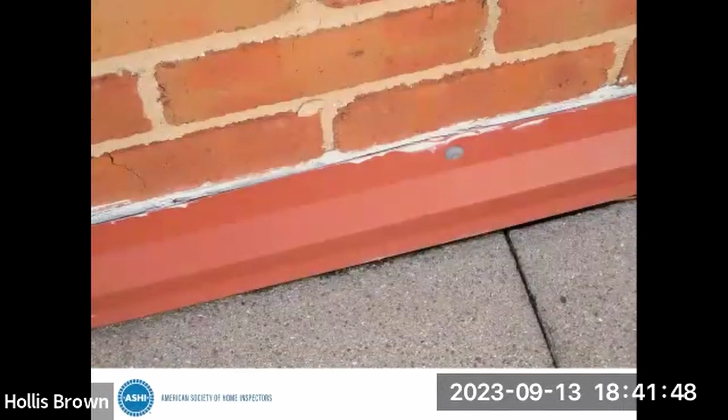So this is a home I was called out for. It's interesting. This guy did a whole lot of renovation work on this home, and he was in a big legal argument with the owner, and so he was paying me to tell him everything that was wrong that he did. And so it was a little bit difficult because he wasn't there, but the owner was there, and I'm having to go over and look at things.

A lot of stuff was coming off of the gutters, the way that they had designed the roof, which was a whole other issue. But the point I want to make is that when you have something that's over an interior space, that's still something that you have to think of as a roof. That's still something where you have to maintain water control. And there's a lot of ways to put a patio or a walking surface over top of a flat surface where you have an interior space, a conditioned space. But when you seal it with something like this, this was sealed ceramic tiles.

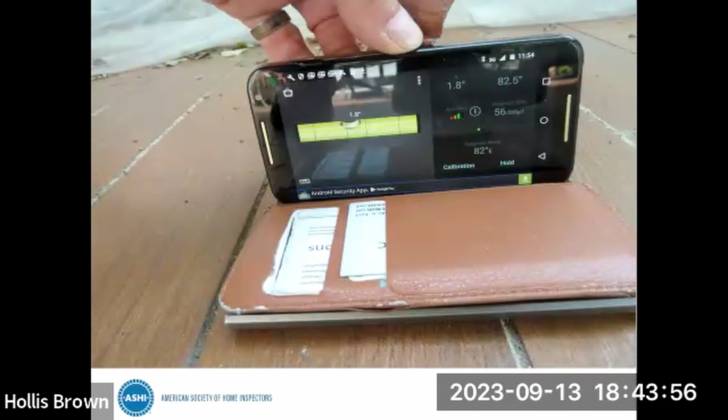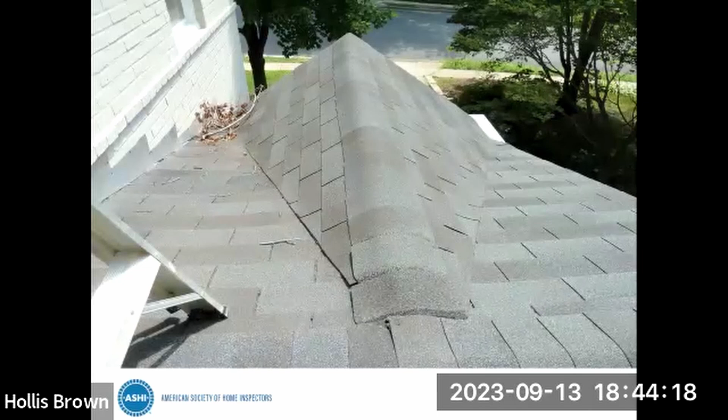These are a couple other things on the house. You can see this is some shingles they just wrapped around a chimney, an old chimney that was sticking through the roof. No flashing. Here's something, I mean, look at this and tell me how many nightmares you could see in this design. You know, if that was my house, I don't know what I would do. I would just tear it off and just reframe it with something else.

But you've got this little pocket here that's already collecting stuff. You're pushing all this water from here and up above, right down into that crack, and who knows what's over there. That's just going over the gutter on that end. And on this side, you've got water washing down here and probably just running over the edge that way as well. So that's just another mess. There's not a lot you can do with it as far as reshingling it. It's just got to be redone.

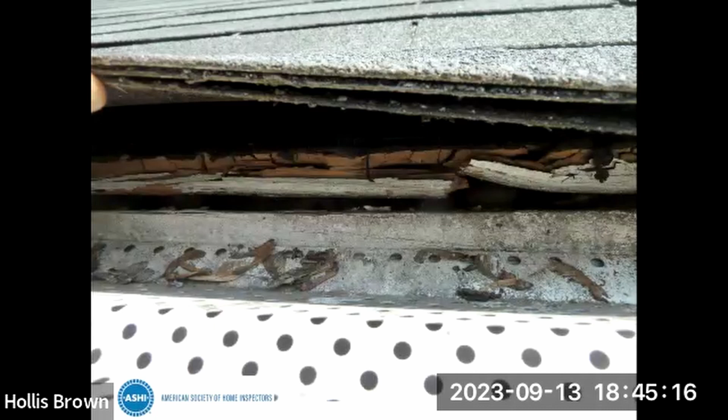If you're on a roof and there's no drip edge, you know, if you can get your hands under those shingles, lift them up a little bit, see if there's any rot there. This thing, you can see that wood is just gone. So they put the roof on and didn't put any drip edge, and that thing's been just dripping over there right on that, probably plywood is what that is. That's gone.

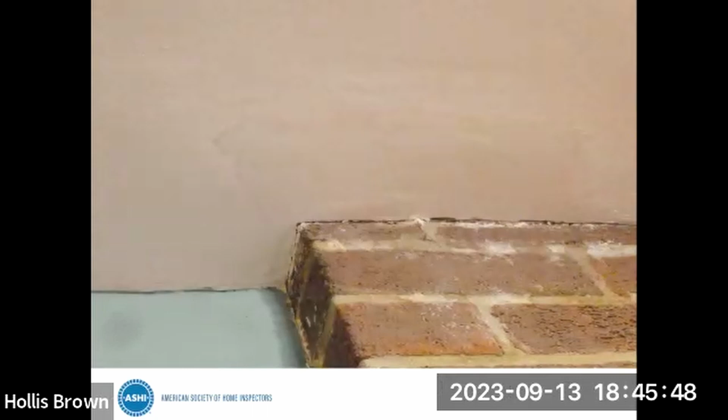I had another case, some nice older folks up the other side of Baltimore. They called me up, they said they had a new roof put on. They didn't have leaks before. Now they have a leak in their family room here, coming down around the chimney. So it's kind of hard to see in this picture, but there's staining right here, kind of all the way around.

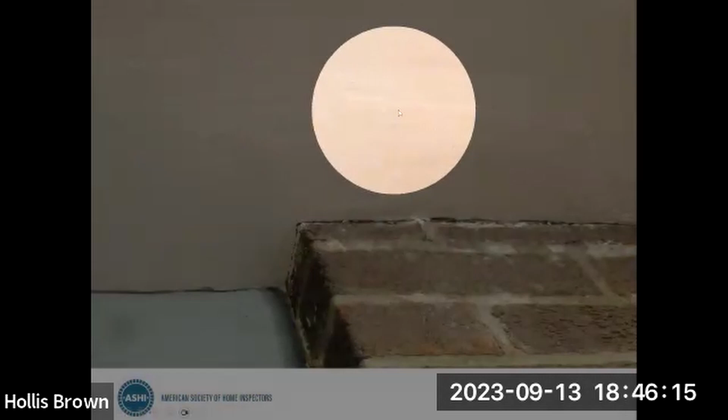So I went up on the roof. First thing, there's some cracks right there at the chimney. So if water's getting in, it's going straight down that masonry into the house. And if you look, it's kind of hard to see. I didn't get a whole lot of good pictures here. If you look at this, and I think I have a couple others, this is just like an underlayment that they use for the flat part of the roof. It's not really a permanent exterior surface.

Also, yeah, the flashing is not anchored at all that I can see. It's just caulked. If it wasn't leaking today, it would leak soon because caulk is not permanent. It really needs to be permanently attached flashing, counter flashing, step flashing, the whole nine yards. And the best is a reglet, which is cut in and actually doesn't need any sealant.

Yeah, the way they used to do it years ago, and I just don't see it like I did years ago unless I'm on an older house, is like you said, they just cut out that grout joint there and just tuck it in and grout it back.

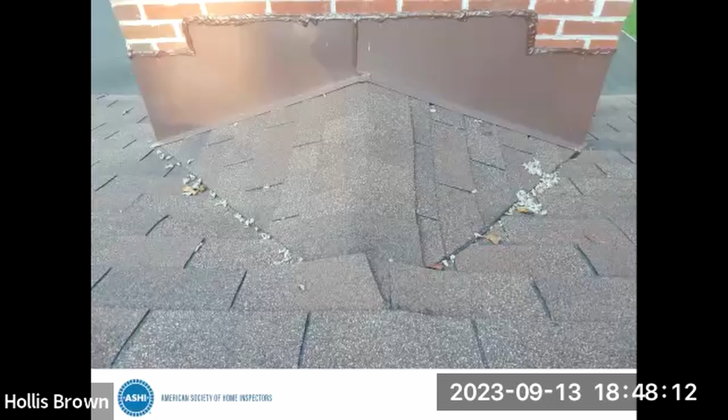On the lower side, it went from a sloped roof on the upper side to pretty much a flat roof on the lower side once you got onto the other side of the chimney. I think originally that chimney was exterior to the house, and then they put on an enclosed porch underneath it. So I'm pointing here to an opening. I think I got another picture that's better than that. There. There were openings all over.

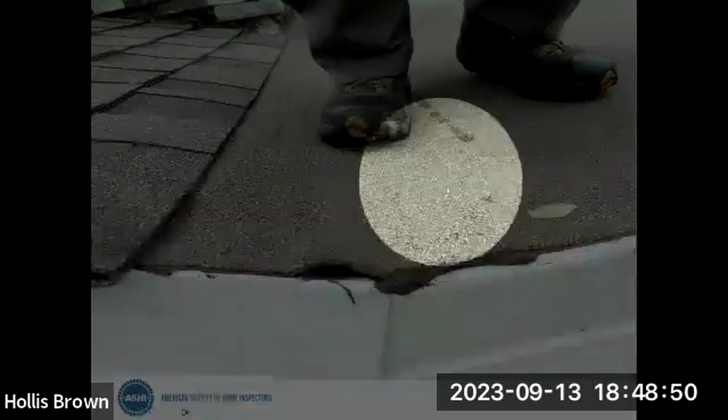I guess in this case, this is a graveled exterior roofing material, but you can see anywhere you're going to have an opening, water is going to get in, and water will go wherever it can go. So just because there's an opening here doesn't mean that it's not running somewhere and getting into the house.

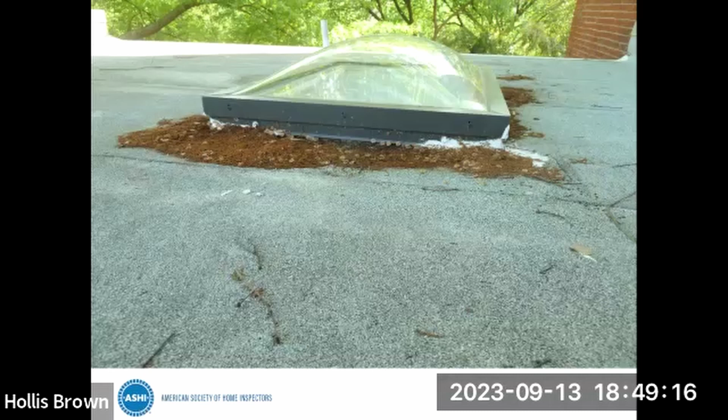This was a 4-story large row house down in DC, right between Georgetown and Dupont Circle. It was a flip in 2016. They'd lived there for 3 years. The lady called me out, said she had a lot of problems. Only 2 of the main problems I'm going to cover in this discussion. But this one here, inside, underneath that skylight, there was water damage, so water was getting in.

So it could be the curb that's leaking. It could be the skylight that's leaking. My question, because we have some of these on our house, the curbs are really low on some of these skylights. I don't know if there's a typical height that you want to see on something like that. 4 to 6 inches, that's what I would expect. But most of these come from the factory already pre-built, and you just set them in there. So that was my guidance to her: have these taken out, put in a taller curb and probably a new skylight, unless she likes that skylight.

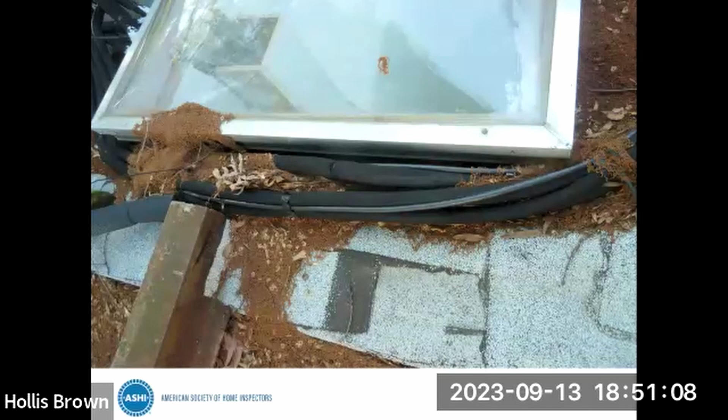So this is another skylight they had. This one's farther up the roof line that's sloping down towards the other one, but you could see this roof was just jammed with stuff. They had, I think, 4 or 6 of the air conditioners up there, and just piping everywhere, everything running across the roof, nothing allowing the water to drain properly.

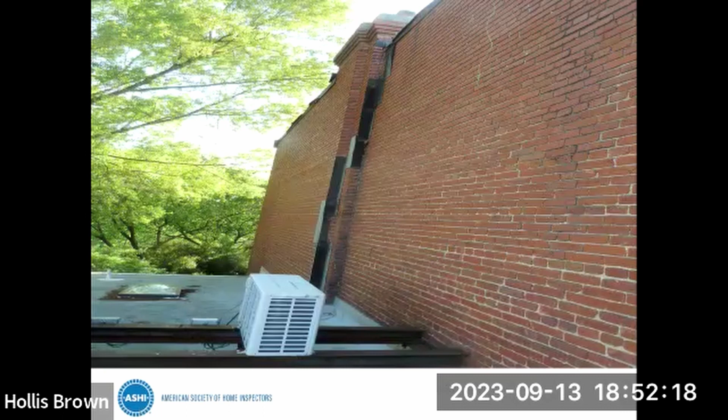So the wall 4 stories down from this is right about in here, where you see some of this where it's already been sealed with some sort of asphalt strips going up to this chimney here. And these two were probably built around the 1890s. So you can imagine how old this brick is, and you can see somewhat how the grout has been aging back.

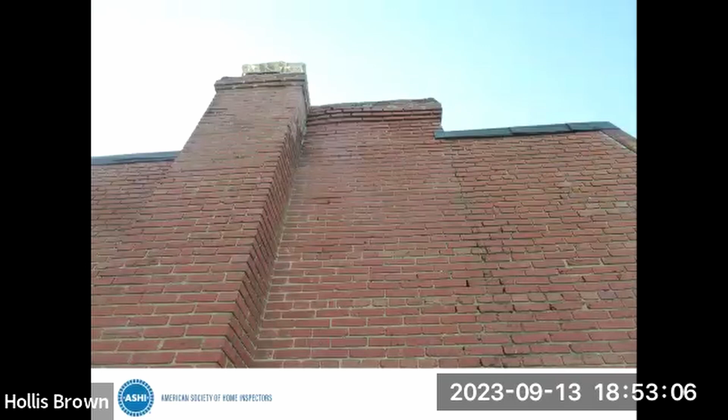So the question is, is it coming in through the bricks? Is it coming in through the tops of the chimneys? Here's another chimney. This may be the chimney in the back, I can't remember. There's 2 of them along the side wall of this place. So you've got the chimneys, which this one was one of; they had all been relined in 2016. So they all had stainless steel liners and caps on the top with the little pull caps where you could close them off from inside the hearth. So my guess was it's not coming down that way, but it could be coming in around this brickwork over in here.

So you could see the ones that had already been relined, and then the one next to it was for the building next door. And the building next door was owned by an embassy. I don't remember which embassy, but the embassy was doing no maintenance to that place, as you'll see in a minute, inside and outside. So my guess is that any water that's coming in is coming in from the embassy next door.

And I told them, you're gonna either have to get them to do some maintenance and sealing on these walls and chimneys, or just tell them you'll pay for it and have it done. But that's probably the only way you're going to solve your water problem in the basement, because that water's just running right through those sponges right downhill.

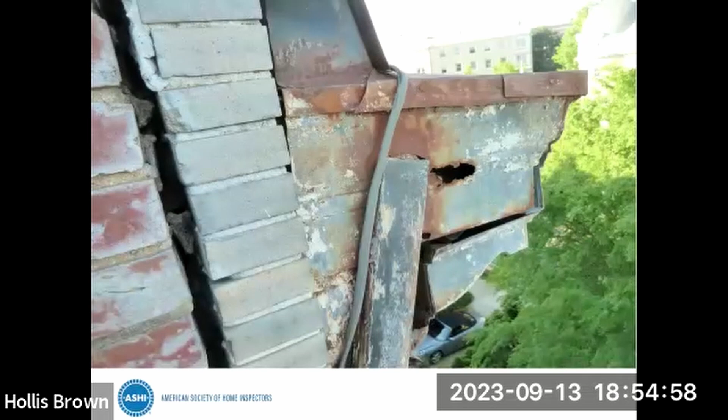So this is the front side of the embassy. You can see how much maintenance needs to be done, or replacement. This is the gutter here. You got a hole in it, it's coming apart. Over here, the front facade is starting to pull away from the rest of the masonry. I mean, it was just a total mess.

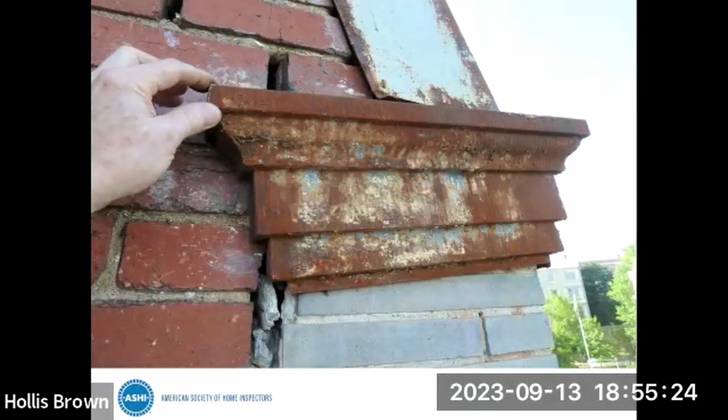A lot of these, there's two different things I'd say if you do any work down in DC on the row houses or anything like that. I either find that they've got these openings that were built 40, 50, 100 years ago, where there's almost no curb around these openings so you can get on the roof. Or in most of the flips I'm finding now, they just seal them off, right? They just close off the ceiling. We don't want to deal with it. So you're stuck with not even being able to get in the attic to see what's there.

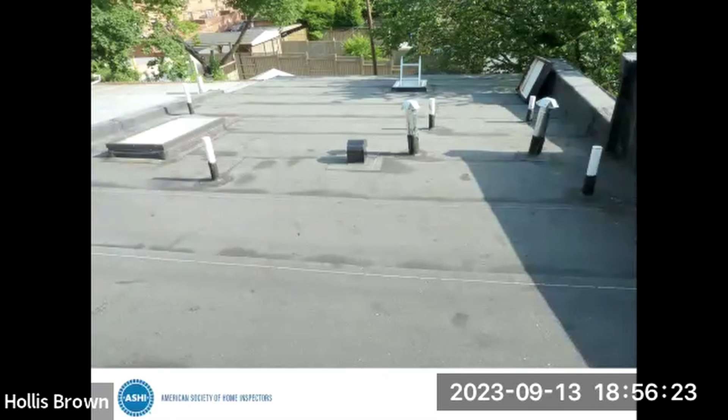This was a flip. This was one of the few, I don't know if you guys ever had it, where the owner or the builder follows you around the whole inspection. This guy was the builder's super or whatever. He followed me the entire afternoon on this thing.

Is this roofing? Is this a finished roof? This is underlayment, right? This is like water shield. This whole roof was done in this material. You can see the pretty little white lines for lining it up for the overlap and that type of stuff. I told him this roof's not going to last. You've got to have them redo it. Oh, that's the paper underlayment? It's not paper. That's modified, but you need the second coat. Yeah, it was real thin. It's like your ice and water shield.

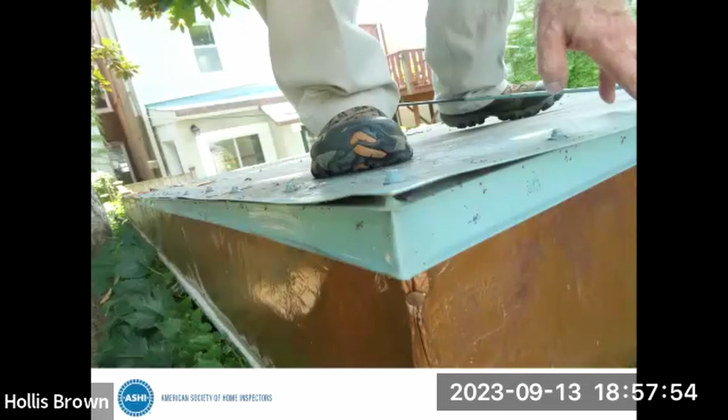And they ran it up. You can see they ran it up over the parapet walls. They just ran it everywhere. No flashing, no aluminum, no anything. There's a shot up towards the front. And the one thing I'm sure you guys know, but I always try to do, even though I'm afraid of heights, let me see if I get it here. No, it's in another one. I'll get to it. Is stick your head over the front and see what's on the other side as the roof goes over.

Yes? Donald, I want to ask you a question. Use the microphone for people online.

Donald, I want to ask you a question. That roof is a modified bitumen roof. You're saying that that roof is incorrect? Yes. The way it sits in the picture? Yes. Because of what? Because it's so thin. It's one coat, one layer. From the picture, it looks to be pretty properly done to me. I wasn't there. I mean, usually when I see a bitumen roof that's rolled like that, it's a thicker material. Okay, whatever you say. I'm not a roofer. I know somewhat about the materials. I've done a few roofs in my day, but if you're saying this is a finished material. It is. That's a finished material.

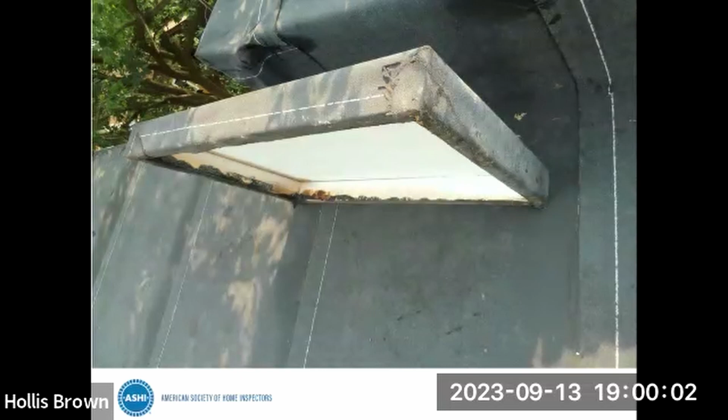And you can see they wrapped the access hole with it, and that sticky stuff was just sticking to everything. It was sticking on the outside. You couldn't get it off. You couldn't get it back on.

This roof, it was interesting that Rushton, those of you that know Rushton, was doing an old house presentation a week ago or something, and he said if you see screws, that should not be on a home. That should not be on something where there's an interior space. You put that on a shed, which is what I'm standing on. This is a shed, but I just wanted to make that clarification.

If you can see it in the background, now that's bad. Let me click this again. You can see that little bump out there on the townhouse in the background. That's the roof that's on that. So these are like 3x5 sheets of steel that are screwed down, same sort of thing. And that's an interior space under that. So you don't want to see that on a finished roof.

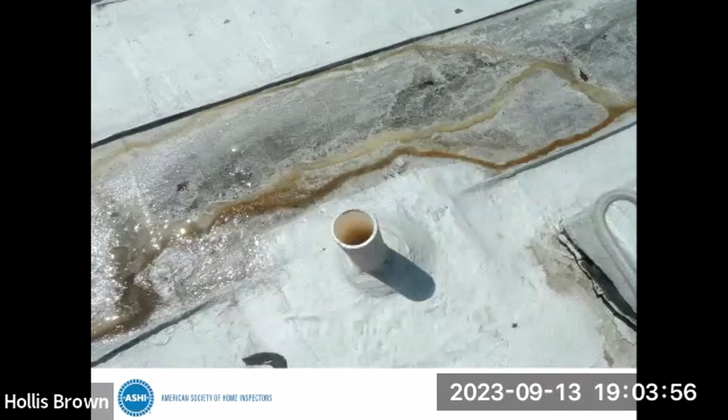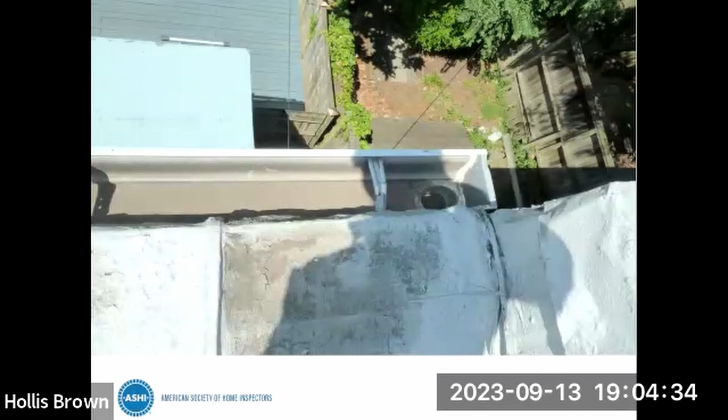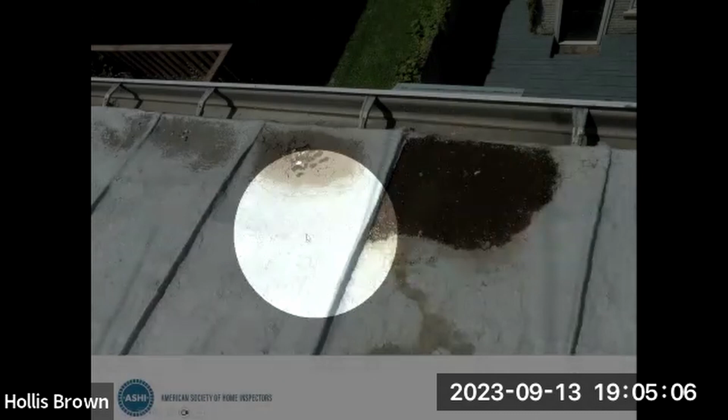Even on a low slope roof on one of these, make sure you're looking over the edge. Is the drip edge really a drip edge? Or is it just hanging there and that water is falling back underneath that and doing some rot to the underlayment? Anytime you've got pooling water, places where you can see pooling water, especially at an edge, is there rot underneath? Is that why it's sinking? But that's something to call out.

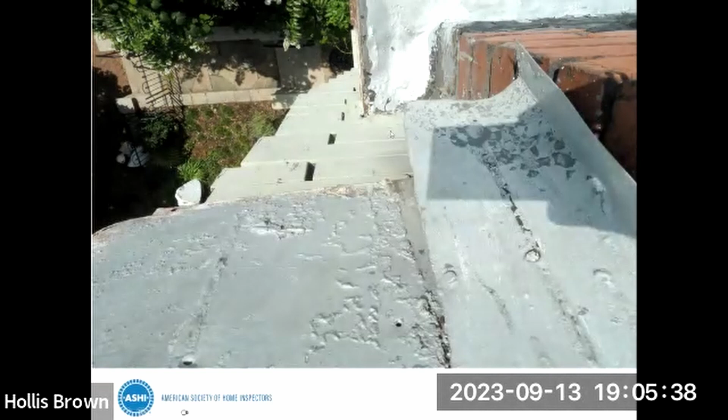And then, like I was saying before, I'm not exactly one who likes heights, but I usually try to stick my head over the front of these townhomes, take a picture down there. Interesting thing here, and tell me what you think, all these little gaps in the corbelling of the front brickwork. Was that original? Has that been there for 100 years? That's my guess. That's the way they did it, and nothing's happened with it.

But you can see all the rust on this metal material, how it's been painted over. So a lot of places for water to get in, just anywhere where there's a crack, where there's two pieces of material coming together. It's just something really to call out.

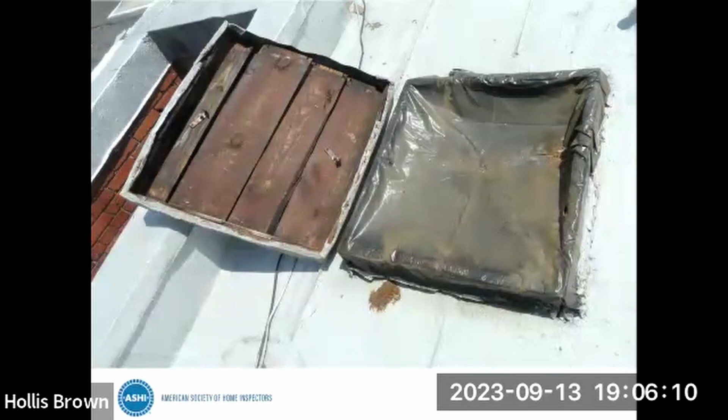This is the same house. This house, of course, because it was a flip at some point, they had sealed the upstairs ceiling to the attic. So luckily they were nice enough to leave the hatch cover. So I popped that off, popped off the plastic, blown in cellulose, whatever that stuff is. Lots of nice stuff you find in flipped houses. Stick your camera down in there, take some shots, see what you can find. That's about all you can do unless you want to crawl around in that stuff.

Just so you know, you can use a pole camera horizontally. You can use a pole camera to get into places like crawl spaces and things like that. And as long as you can bend it to get it in there, you can get, like I see a can light in the back. It's probably covered in cellulose, which it's not supposed to be.

You talking about that? Yeah, or up and to the right. Yeah, right there. Oh, yeah. That looks like a can light. Right there. Maybe that too, even. Got all kinds of wires popping up and down. A lot of that old cellulose was poured in. It wasn't blown in, it was poured in.

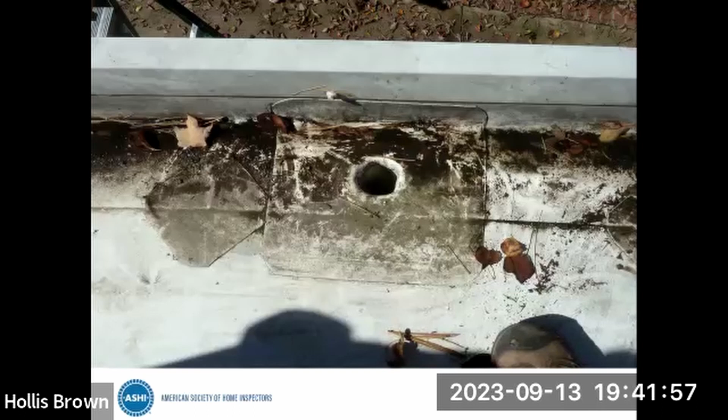There's the size of one of the openings that goes down into the soffit, into the downspout. Unfortunately, I didn't put a ruler on there and take a picture of it, which I should have. When I wrote it up in the report, I wrote it was about 2 to 2.5 inches. So that's 2.5 inches going into a 5-inch downspout.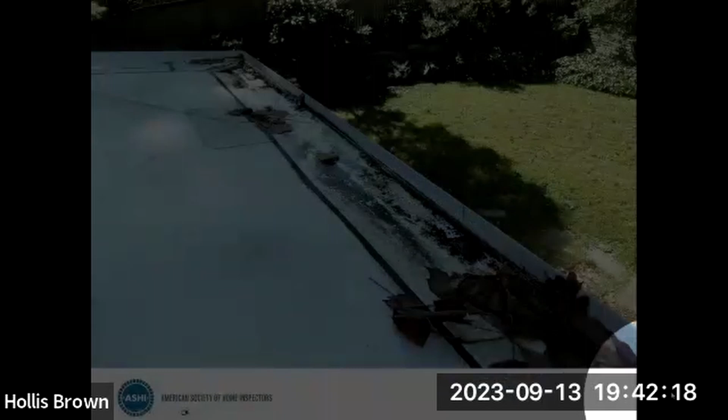There was that one which was down here towards over here. The other one, this is on the downside of a pretty large, you'll see in a minute, roof surface. So 2 of them on the bottom edge.

There's a picture of the roof. I don't know if you guys use, what is this company? Eagle View. If you ever don't get on a roof, but you really want to know something, you're curious about things, this is mostly done for roofers, so you're not going to get a lot of quality pictures or anything. But I wanted this because I was working this up for them regarding rainwater flow and the amount of rainwater that's hitting this 2,462 square feet of roof space.

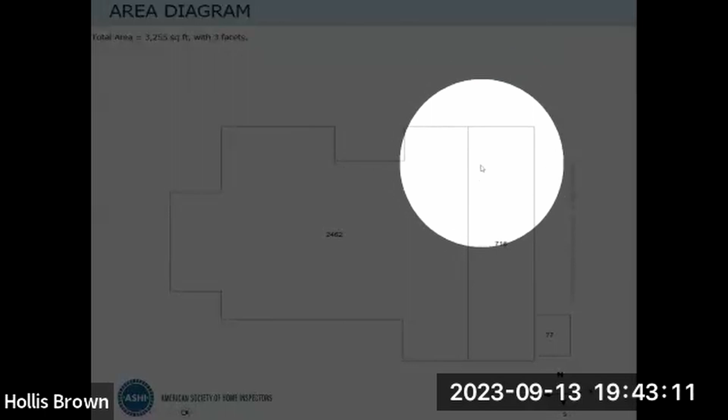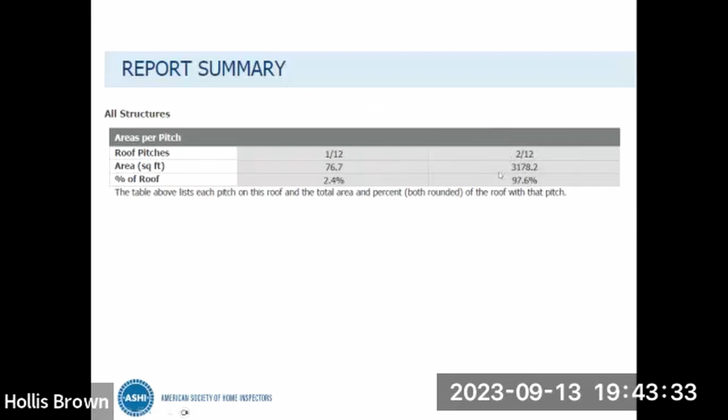So this slopes from this line here. This is basically the peak of the low slope roof. All this water's coming down here. And then on the upper side, we've got 2 over here. I think I got a picture of that or a drawing or something. So 97% of the rainwater is running at 2/12 slope. That's where your drains are on that roof. So you can get an idea.

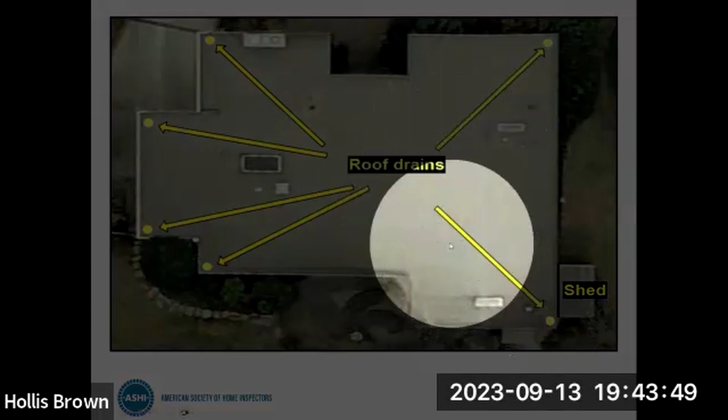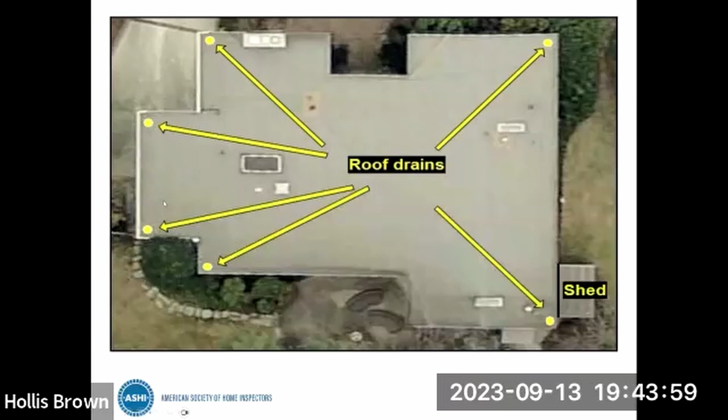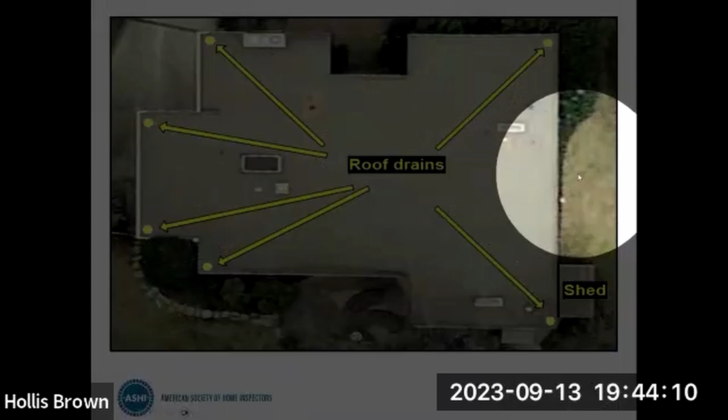So all this water from this point here is all coming down, going somewhere. And I'd say probably 80–90% of it is hitting these two right here. And it's just going right over the side. And the same on this, even though this is a narrow area here, these things were so far apart that water's just coming over the edge. You'll see it in another picture.

A couple little things on the roof. So if the roofer said, I did a good job, the surface, there was not really much wrong with the surface other than these few things. But it was the whole idea that they didn't even think about the volume of water they were trying to handle and where it's going to go. So they're like, yeah, we put a new roof surface on, but we just filled those.

So the builder or the contractor came back out and he said, yeah, we did a few things. So this guy who was sent out to fix a couple of these little holes squirts a little piece of caulking here, but he still misses the hole.

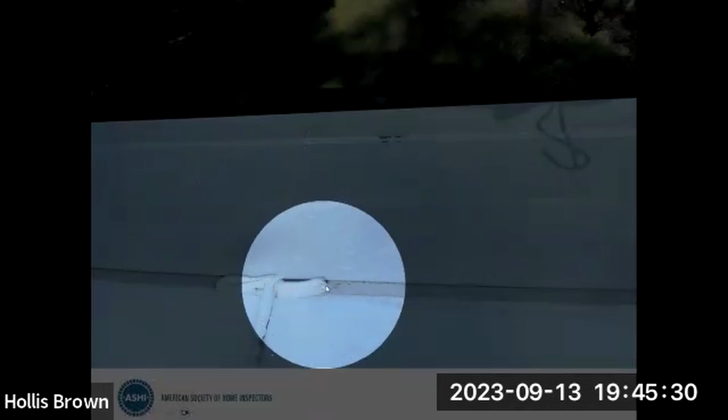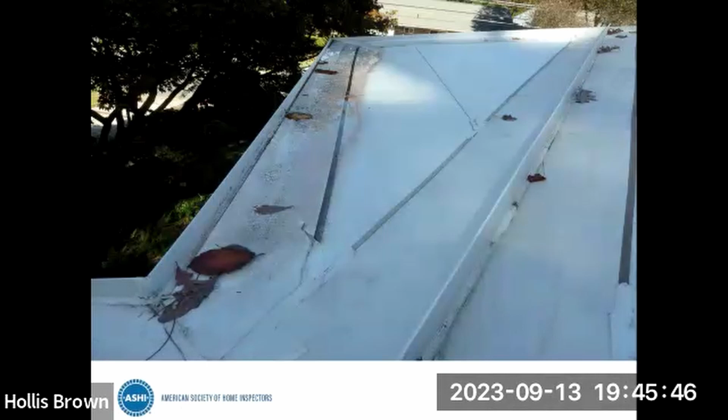These are the little side cutouts, pockets, whatever you want to call them. So I just wanted to throw a level on there to see if they had any slope at all. This one here, I think there was rain maybe a few days before. This is all water, standing water right here. And that's underneath where they've got these little guides to carry a lot of that fast running water away from going over the edges. That's part of the report I wrote, just a whole lot of stuff.

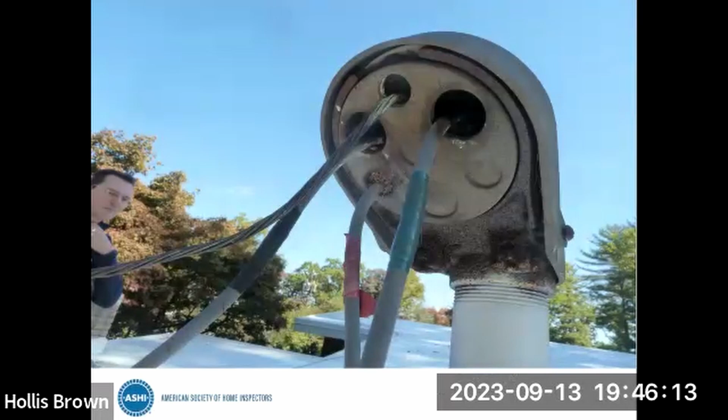This was on the roof. Anybody have any idea what kind of service this is? That's 3-phase. Boy, that was quick. So the comment from the field was 3-phase. So whoever owned this house back in the 60s, they had built a, what were those things from the bomb days? Fallout shelter. So they had built a fallout shelter, and he had put in 3-phase.

He had all kinds of stuff apparently in there, plus a wood shop that he had after he no longer needed the fallout shelter. I don't know if it was still running 3-phase. I told them they needed to look, and if they didn't know what they were paying, they should probably call Pepco.

This is one of the newer townhouses. Most of us in here, I don't know if you guys remember Howard K. Smith, the announcer on ABC News, nightly news. So he had a nice piece of property up in Bethesda, and when he died, they sold it off and built these row houses, townhouses, whatever. Again, this is a 4-story unit. This is the roof. These are little wood squares. It just all fit together. They're sitting on top of like little posts up off of the flat roof.

Excuse me, Don, Mark's got his hand up. Mark, what'd you have to say? No, I forgot to take it down, sorry. Okay, thanks.

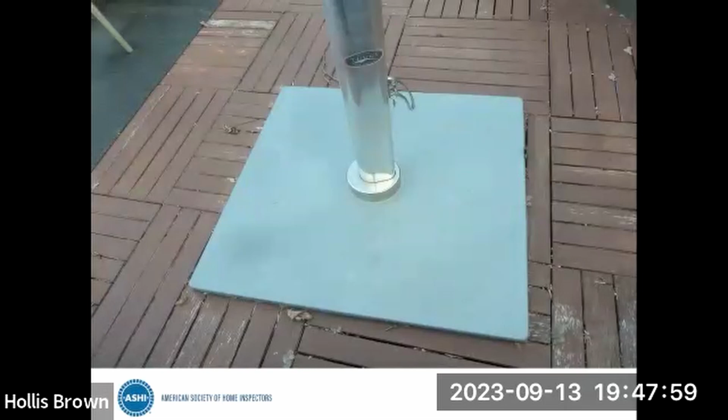So a lot of stuff on this roof. I mean, you could see they got air conditioners, they got plants, they got tables, chairs, everything. So I just popped up a few. They had this thing here, which I couldn't even move. It must be several hundred pounds. It's got an umbrella on top of it, and this is just a weighted bottom to keep it from flipping over. But all that weight's there.

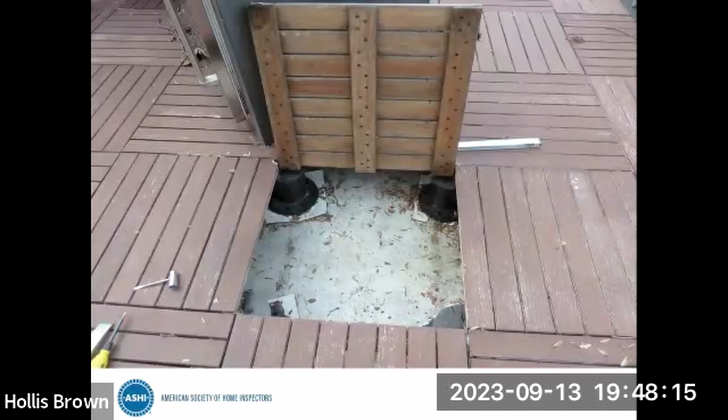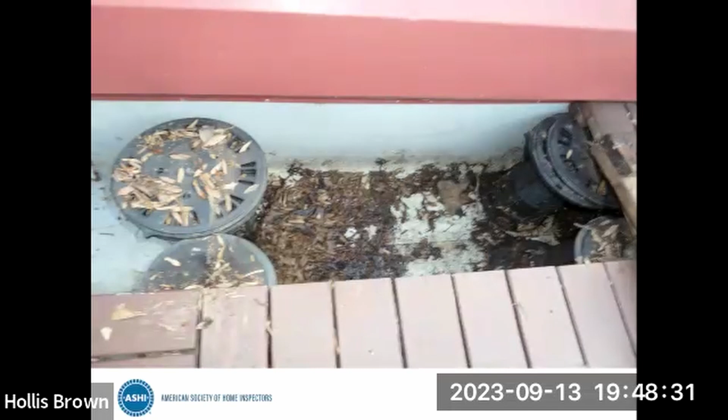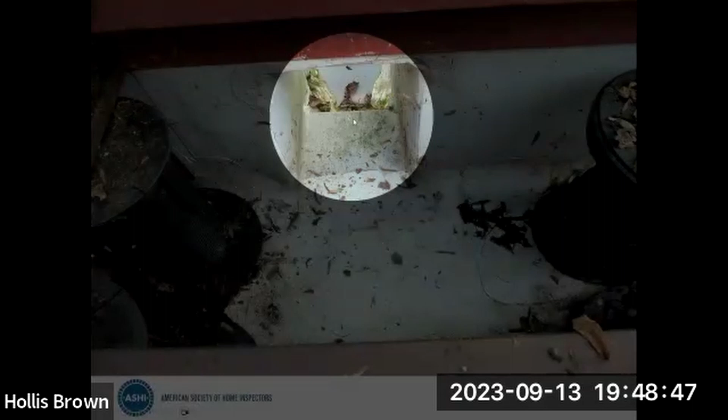So I popped up a couple of these. You can see them mounted on these little screw posts to get them all level. Got under there with my camera, shot it a few different directions just to see what was over there. Not a lot of debris, but you know, it needs to be cleaned eventually. Went up to the sides to where the water is going to go down to the lowest point. There's another shot of that. There's a shot with it going out the scupper. And this is the one exit point for that entire roof.

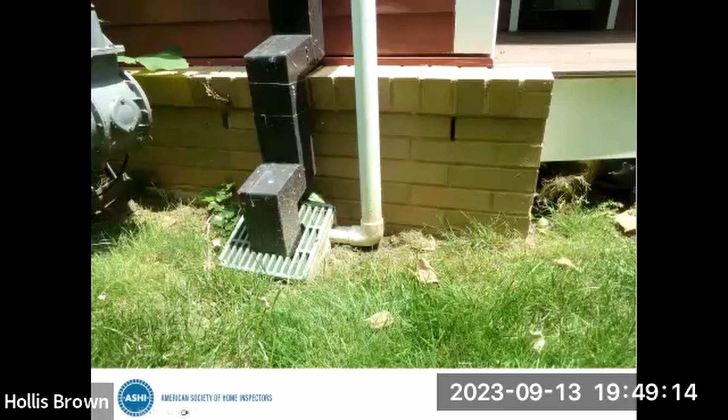There's a bad shot from the ground. That's where the scupper comes out right there. And there's just a lot of elbows in that thing. So it comes out at a right angle and then goes down, and then another right angle and then goes down. Comes all the way down here into this mess. Another right angle, comes down, another right angle, down into the ground, under the ground, and then out into the woods farther down the way.

Did that upper roof that had the scupper, did that have a secondary scupper or just a single scupper? That's the only thing I found. Wow. Because it's supposed to have a secondary. Right. I mean, this side here, so this is the property line here. So all this over here is somebody else. You can see there's no scuppers there unless that's some sort of secondary drain. I don't know.

They had two pop-ups. This side, there was an elevator, so this is where the elevator equipment was, and the raised, I don't know what you call it, like a raised shed. And it's got a stairway there, one on either side. So I popped up on top of those. One of them was just fine. This one was the one on the left side. It had all kinds of problems.

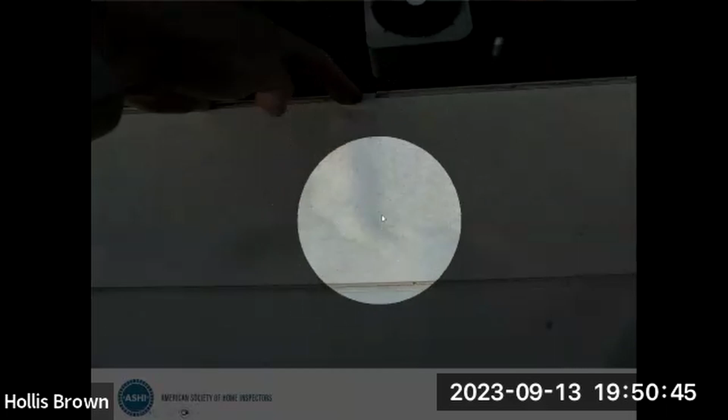A lot of bubbles everywhere in the flat roof itself. It hadn't been sealed down. It was coming up for some reason. A lot of the same thing on the sides. Just looks like little wormholes coming in. And then all kinds of other weird stuff. Anytime you've got all these little curves and things that come together, different materials, different slopes and angles, everything can be a leak point. You just don't know.

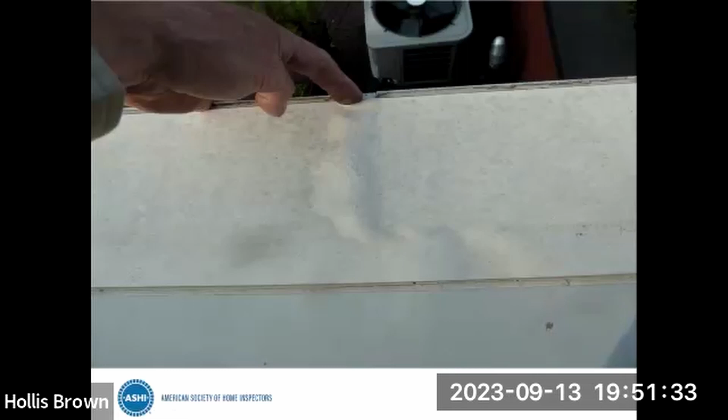I thought on roofs like that the roof material was supposed to be wrapped up, continuous, one piece, up the sidewall with a cant strip so you didn't have a right angle. And I'm seeing what looks like two pieces joined at the wall with caulk, and that's just plain wrong. You talk about this? Go back one. Just a little bit below where your line was, that's a seam. You talk about this? Yeah. I see, yeah, this is an outer edge, right?

Okay. And you only need cant strips for roll roofing, not for membrane. Say it again? Cant strips, you can use them, but they're required for roll roofing because it doesn't bend as well as the membrane. But membrane can do a 90-degree, whereas roll roofing can't. And just more ugly stuff. And you just look at that. If it's not leaking now, it's gonna leak. It's just bad.

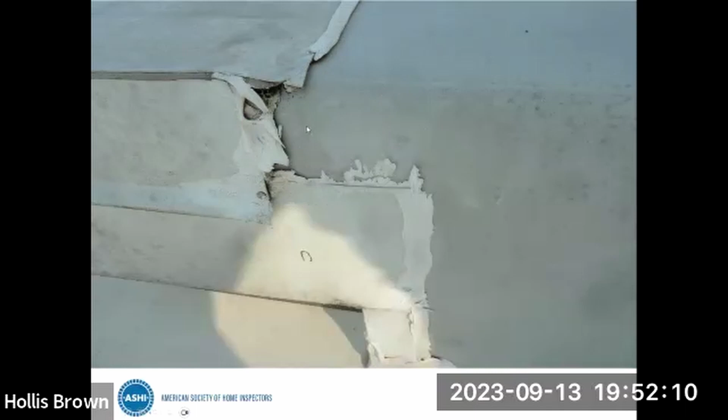This is a roof I just did the other day, not really much to tell you about this. To me, this is probably a good intro into what we're gonna talk about next, but is this low slope or is this enough slope that it's not a low slope? See, I wrote it up that this needs to be rolled roofing.

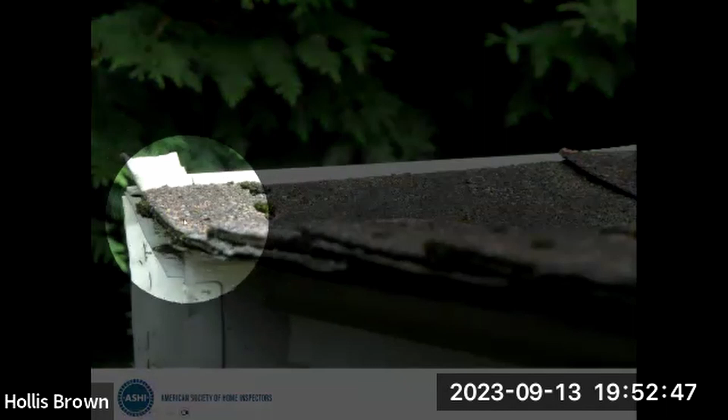This is too much of a low slope, and it has other issues like here, where it comes down right to the edge, and then it curls right back up. So I don't know if that's just because the gutters kicked it up there, or the shingles are sticking out too far, but I don't like to see it where water's gonna come backwards and possibly come up under these shingles here and rot stuff out.

Hey, Don. So you mentioned something about rolled roofing on the low slope. So it's my understanding that you can put shingles on a low slope roof, but you have to put a special underlayment underneath, depending on the manufacturer, which isn't something we'd be able to see. So saying it has to be rolled roofing may not be the best thing to say, but mentioning that there are special installation requirements and there's no way that we can see that they're there is an important thing, in my opinion, to get across to the clients that if this isn't done right, it's wrong.

Yeah, I don't say must generally. I usually say based on my experience, I recommend that something that is this low of a slope be done in roll roofing, just because it doesn't shed the water as well. And when you start putting things in here like skylights, it just adds to the water being trapped behind the skylight or other things. Because I've had several homes that have these low slope things. It just has water problems no matter what.

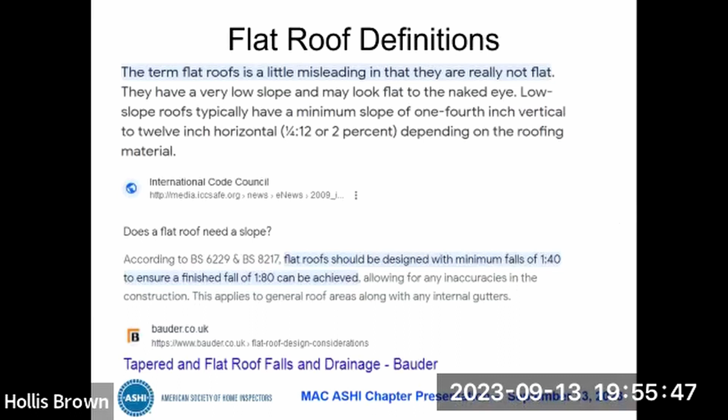So that was interesting. After doing all this, I said, well, what really is a flat roof? Because I never write it up in the report. You have a flat roof, or your slope is 2/12 or 3/12 or whatever. So International Code Council says for a flat roof, you need a little bit, 1/4:12 or 2%. There's another one. This is from the UK. Flat roof is less than 10 degrees. So they do degrees in UK, I guess.

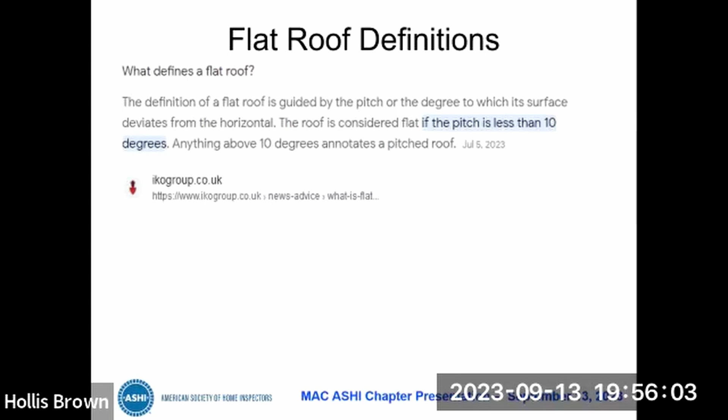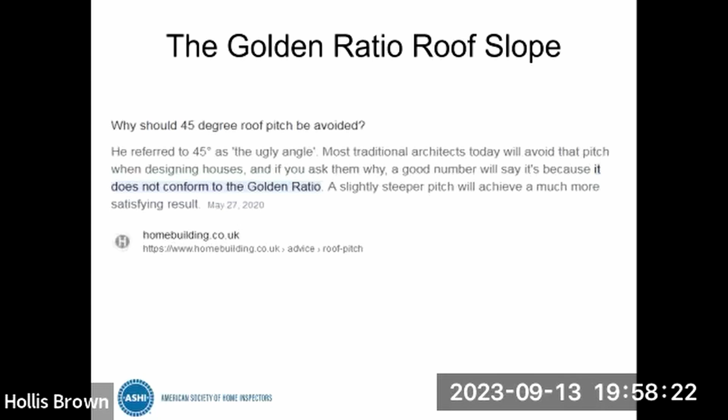So how much time do I have?

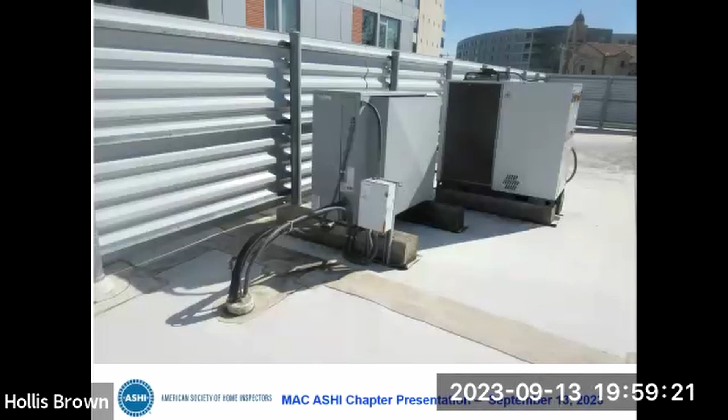One minute. So factors affecting a slope: weight, rain if it's really pounding, snow and ice that sit on a roof, type of roofing materials, if you put a slate roof on a house that doesn't have the support for it. You got wind that can blow off shingles and things. You got to deal with drainage. Sometimes the appearance has an effect, if they want something that looks nice but doesn't really work. Maintenance on the roof, and then depending on the roof surface and how well it's shedding the water and installed, deterioration of the structure. I got some more, but I'm out of time.

Okay. Yeah, thanks, Don. That was a lot of effort that went into that.